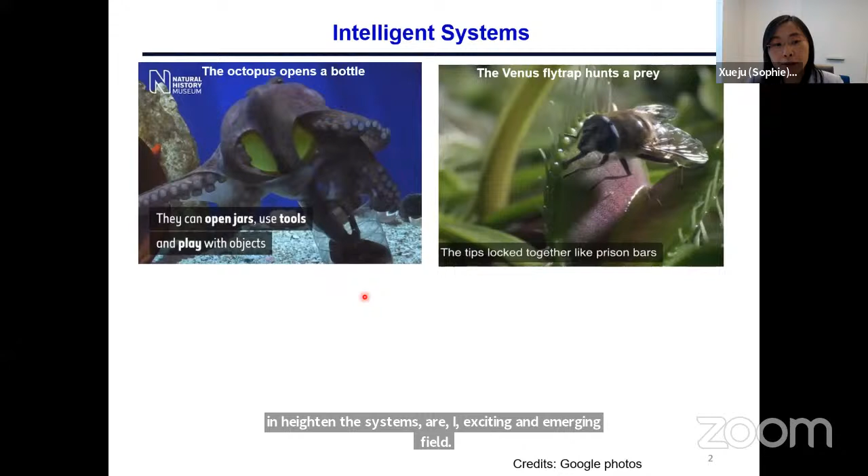So as the title indicated, today I'm going to share with you our work on morphing materials and multifunctional structures and electronics for potential applications in intelligent systems. Intelligent systems are an exciting and emerging field. When we talk about intelligent systems, we can easily think of our familiar biological systems. For example, an octopus, which can change its shape and color to adapt to their environment. The Venus flytrap is another example. It can catch the prey when its sensitive hairs in the inner surfaces are triggered by the prey's movement.

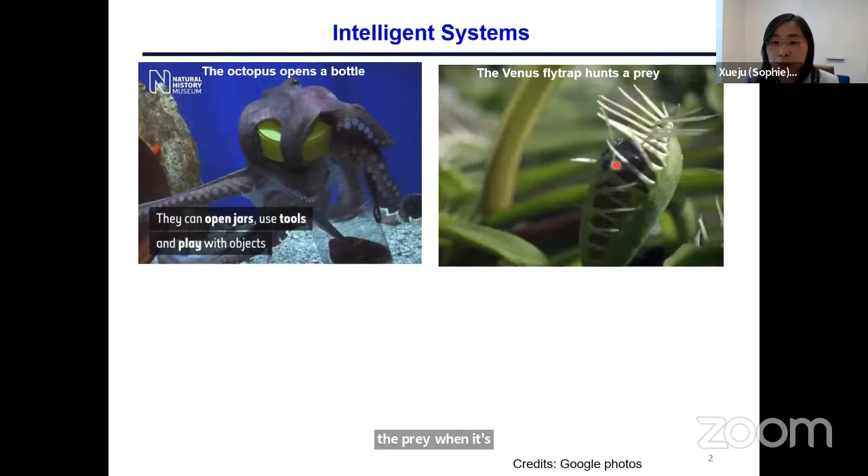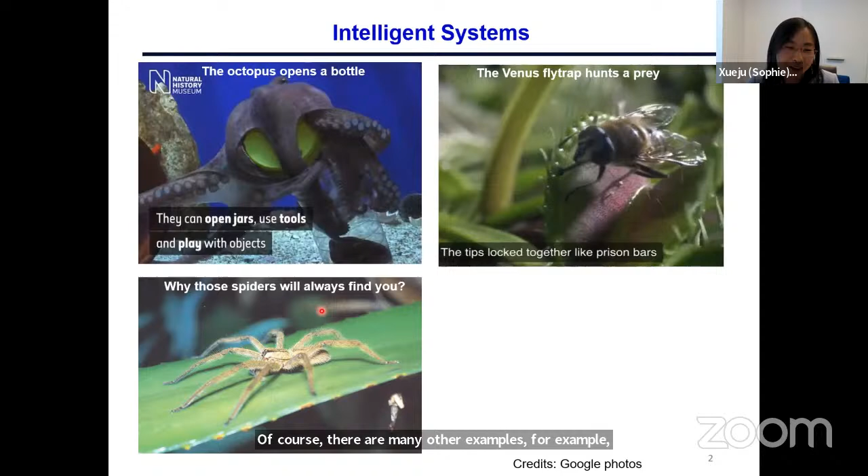Of course, there are many other examples. For example, the spiders, which will always find you. It sounds a little bit scary, but this is because it can detect even very quiet movements by using its more than 3,000 strain sensors distributed across its body. Last but definitely not least, our human body, right? The human brain is such an intelligent system that there is so much work going on trying to unlock the mystery of the human brain, including the electrical signals and more recently, the brain chemistry. So understanding and mimicking the performance of those intelligent systems are significant for many engineering applications. For example, for performing tasks in unstructured real-world scenarios, disease diagnosis and treatment, and many others.

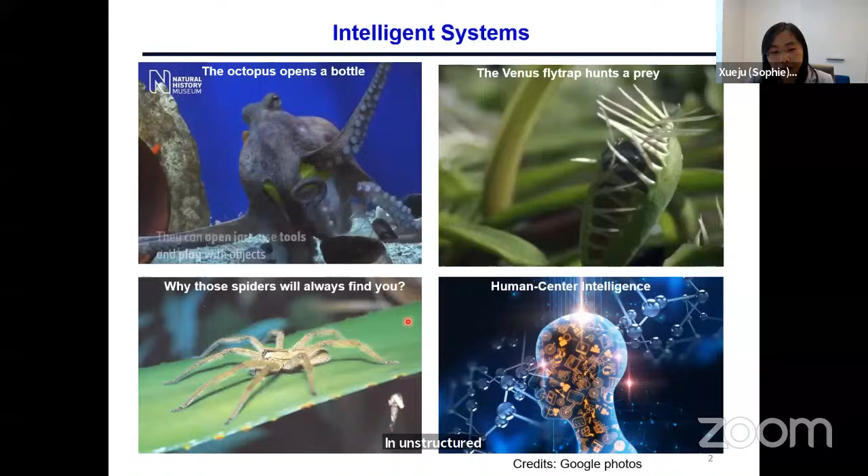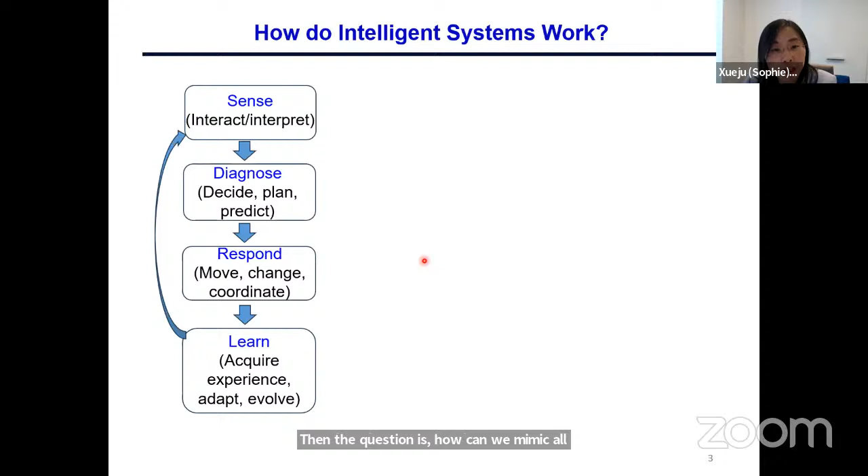So how do intelligent systems work? Basically, they first sense or interact or interpret their environment by using their sensors, and then they can diagnose and respond by moving, changing their morphology and colors. Those information can be further stored and processed so that they can acquire experience and evolve over time as this loop continues. Then the question is, how can we mimic or eventually even go beyond the performance of those intelligent systems that exist in nature?

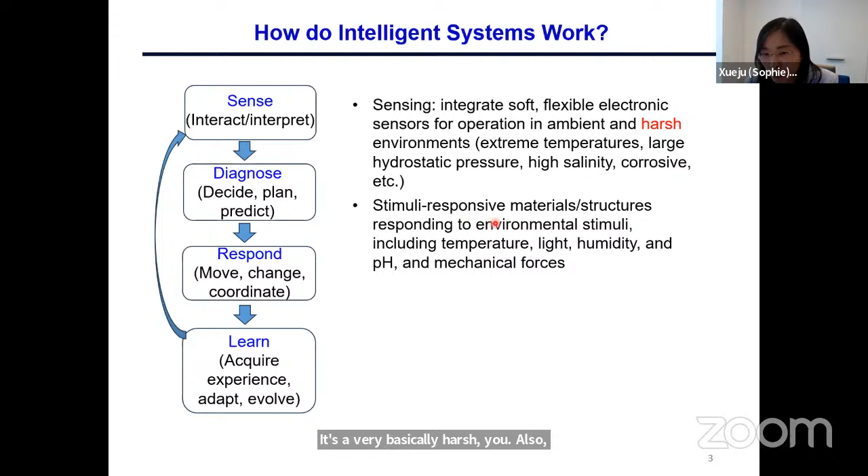So to do that, for example, first to sense the environment, we need to integrate sensors, usually in a soft, flexible manner for operation in ambient environments, but also in harsh environments. For example, extreme temperatures, large hydrostatic pressure, high salinity, corrosive environments in the ocean, because if you think about the environment that a lot of creatures like an octopus live in, it's basically a very harsh environment. Also, we want to have stimuli-responsive materials and structures that can respond to environmental stimuli, including temperature, light, humidity, pH, and also mechanical forces to basically interact with the environment.

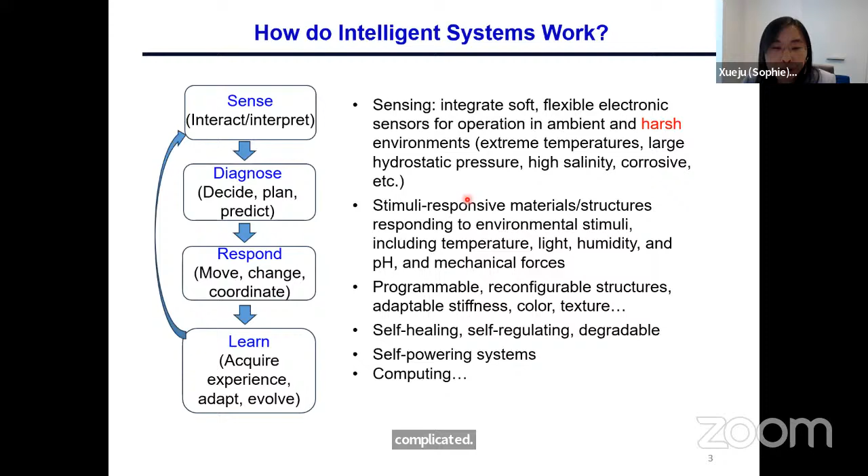Also, it is important to adapt to the environment, which can be realized by, for example, programmable, reconfigurable structures, adaptable stiffness, color, texture. Additional features include self-healing, self-regulating, degradable, self-powering systems, and computing. So it has to be admitted that intelligent systems are very complicated. For the past few years, I have been trying to address some of those aspects in my group. Basically, we work at the intersection of materials, mechanics, and multifunctional structures and electronics.

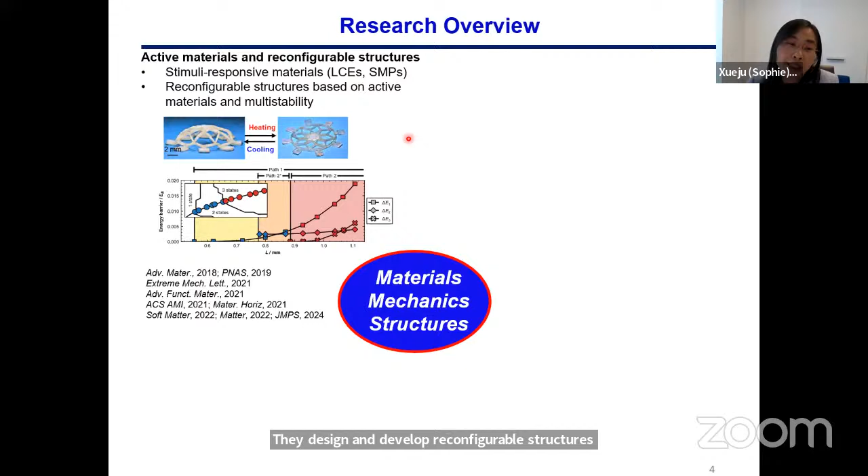More specifically, we study three major directions. One is active materials and reconfigurable structures, including stimuli-responsive materials like liquid crystal elastomers that I will discuss later, and shape memory polymers. We design and develop reconfigurable structures based on those materials and also based on mechanical multistability. In addition, we also develop functional structures to interface with biology, including 3D electronics for the monitoring and the stimulation of engineered tissues, and also 3D microfluidics in a shape-programmable manner to mimic many biological features.

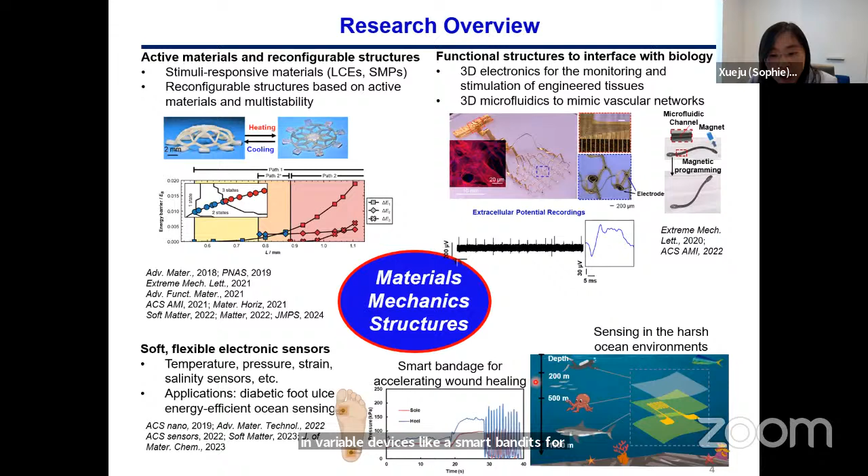In addition, we also develop soft, flexible electronic sensors, including physical sensors like temperature, pressure, and strain sensors, and also chemical sensors like salinity sensors for applications in wearable devices like smart bandages for accelerating diabetic foot ulcer healing, and also for sensing in harsh ocean environments.

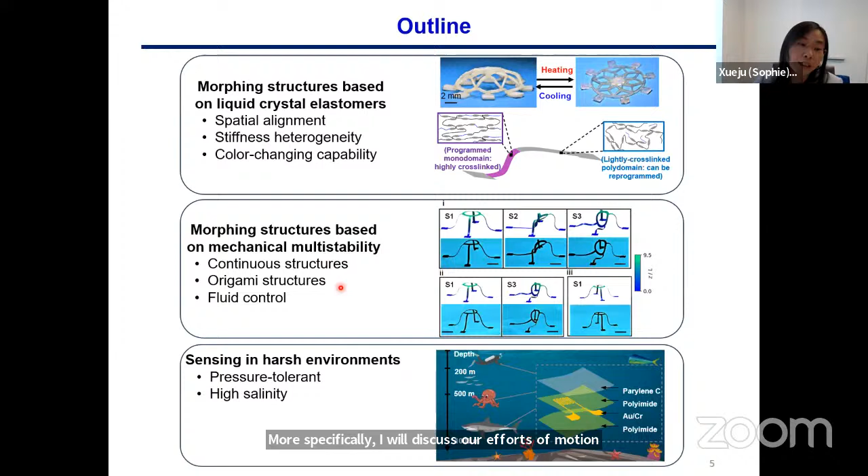So in today's talk, I will cover some of those aspects due to the time limit. More specifically, I will discuss our efforts on morphing structures based on active materials, liquid crystal elastomers, and also based on mechanical multistability. And then I will discuss our efforts in sensing, especially in harsh environments.

Okay, so morphing materials and structures are promising for many applications like soft robotics, artificial muscles, and other intelligent systems. Based on the deformation mechanism, typically morphing structures can be divided into two categories. One is based on soft active materials like hydrogels, magnetic composites, liquid crystal elastomers that can respond to external stimuli like temperature changes, magnetic field, and humidity to change their shapes and therefore their functionalities.

So those types of soft active materials have enabled a lot of interesting and exciting opportunities and structures. One potential limitation is that they require persistent external stimuli to maintain the deformed state. For example, for the magnetic composite structures, when we remove the magnetic field, the structures will return to the original shape. So this may cause some inconvenience and also make it less energy efficient for some applications.

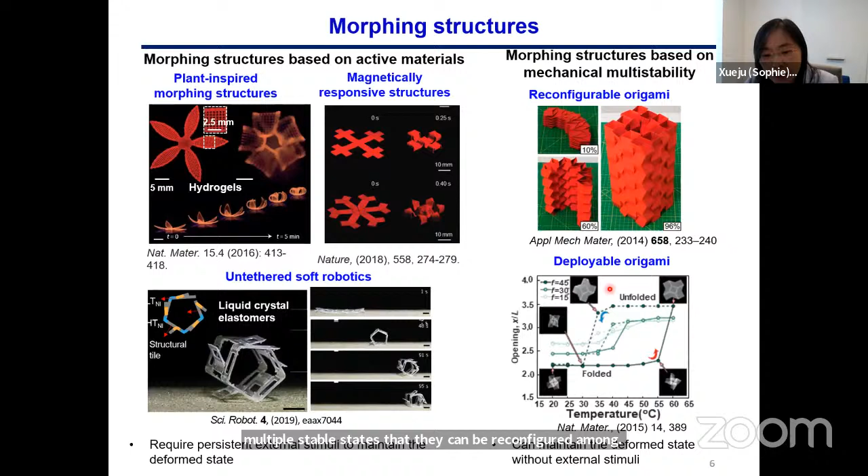So in the past decade, people also developed morphing structures based on mechanical multistability. For example, origami and kirigami structures that have multiple stable states that they can be reconfigured among. So an advantage of this type of morphing structures is that they can maintain the deformed state without the need for persistent external stimuli because its state is locally stable.

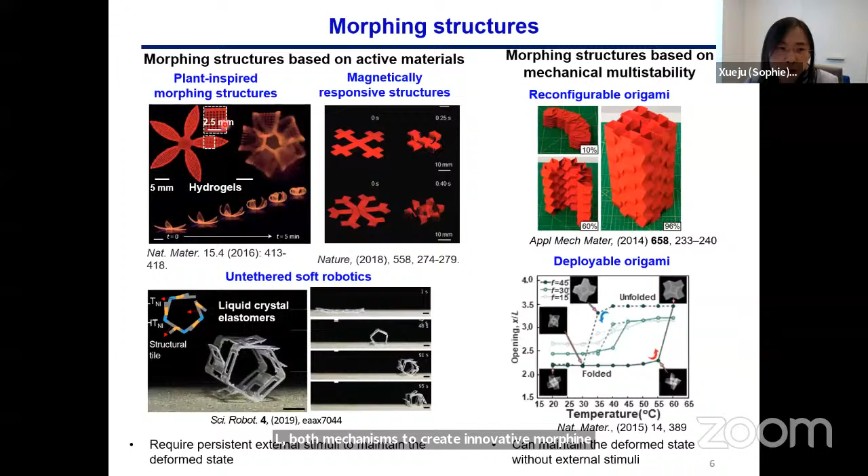So next, in this talk, I will discuss our efforts for both categories and also our efforts leveraging both mechanisms to create innovative morphing structures. So I will start with morphing structures based on soft active materials, in particular liquid crystal elastomers. Liquid crystal elastomers are a type of smart material that combines the rubber elasticity of polymer networks and the orientational order of liquid crystals. I think we have also had EML webinars given by Kaushik and Robin on these materials.

So this material has attracted much attention for applications including artificial muscles and soft robotics because of their unique properties, including soft elasticity and large reversible shape changes. The reversible shape changing behavior is closely coupled with a reversible state transition of liquid crystals, also called mesogens. For example, to program mesogens in liquid crystal elastomers for actuation, we first align the mesogens along a direction called a director into a state called a nematic state.

Heating above a temperature called the isotropic clearing temperature will disrupt this mesogen order into an isotropic state and drive the macroscopic shape changes. This state transition can be reversibly realized so that we can have the reversible shape changing behavior upon cooling and heating across the isotropic clearing temperature of the structure. So you can see that the reversible shape changing behavior is closely related to the mesogen alignment, right?

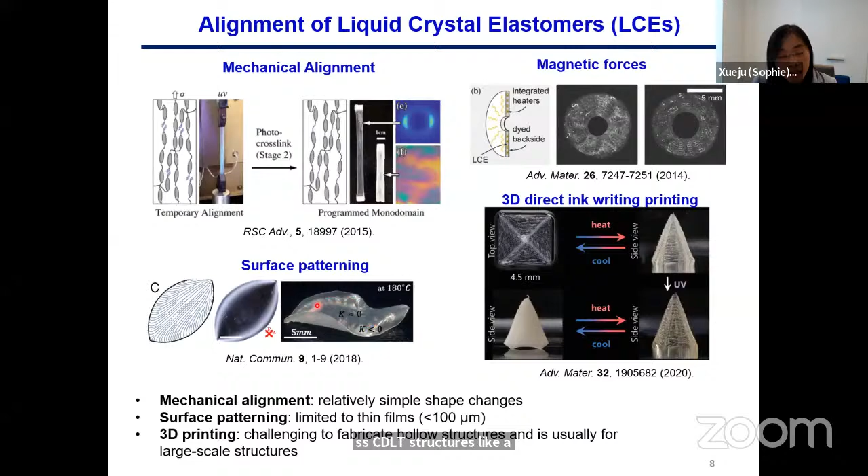So those techniques are great for creating diverse 3D LCE structures for shape morphing, but still it's very challenging to create, for example, hollow open-mesh 3D LCE structures like helices and spirals for many applications like soft robotics and other intelligent systems. So here we developed a facile and versatile strategy for the spatial alignment of LCEs to create previously inaccessible 3D LCE structures.

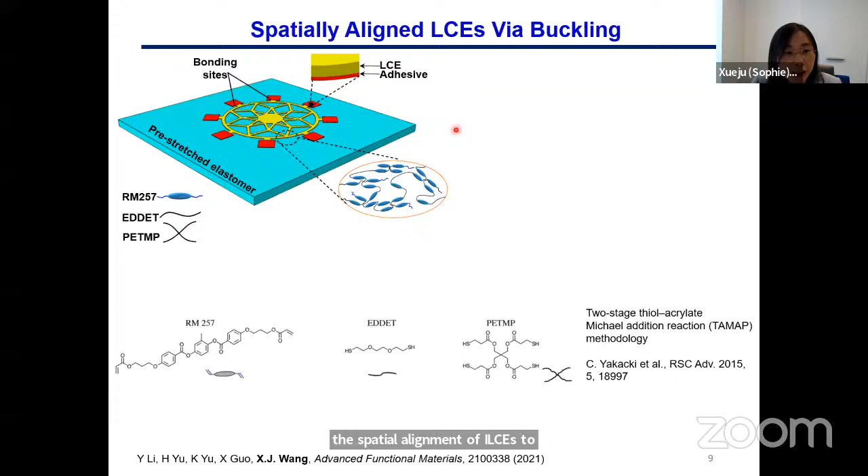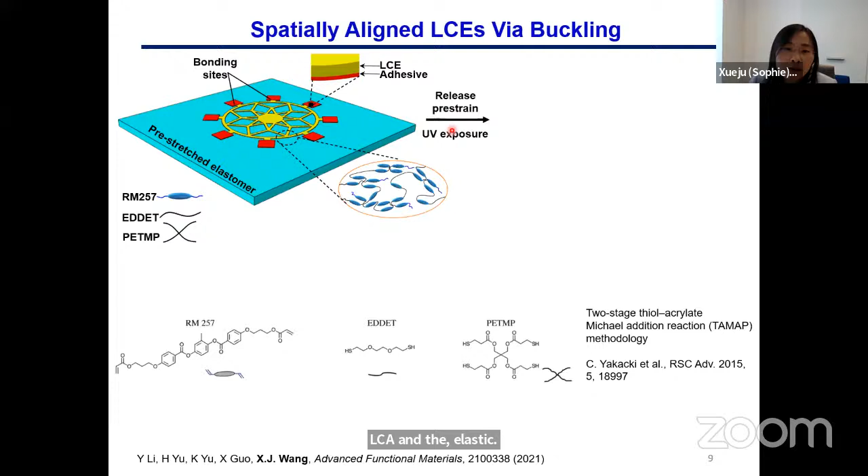And then by releasing the pre-strain, we can geometrically transform the 2D patterns into the 3D architectures due to these compressive forces. So during this process, the mesogens are spatially aligned into their nematic state because of the compressive strain in the material. So UV exposure induced additional cross-linking and also permanently programmed the mesogen alignment, which provides immediate access to freestanding 3D LCE structures.

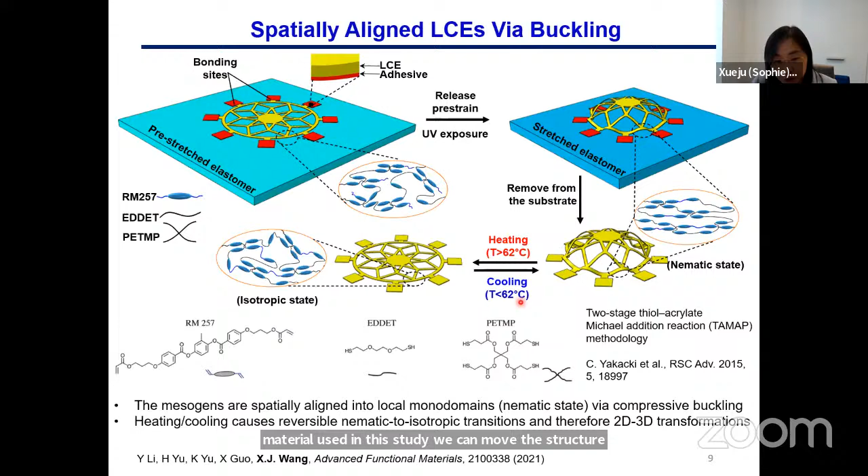By heating and cooling across the isotropic clearing temperature, which is 62 degrees for the material used in this study, we can morph the structure between 2D and 3D configurations reversibly. Okay, so here are the experimental and finite element analysis results of the 3D LCE structures, as well as the dynamic shape morphing behavior of the structure.

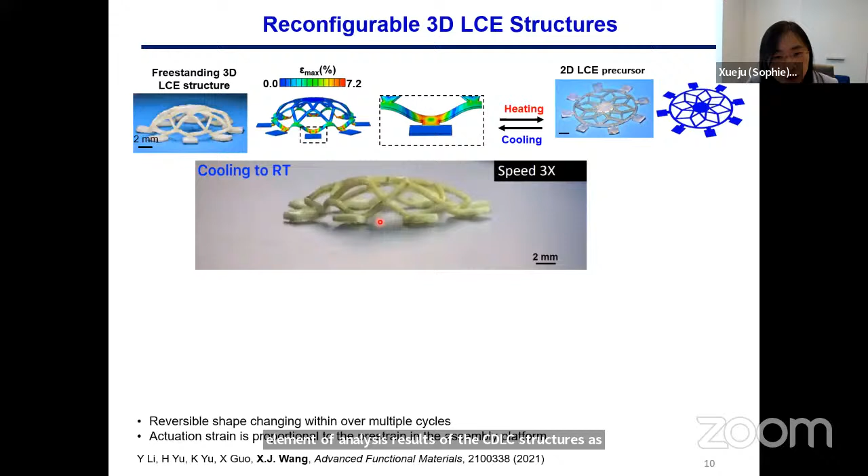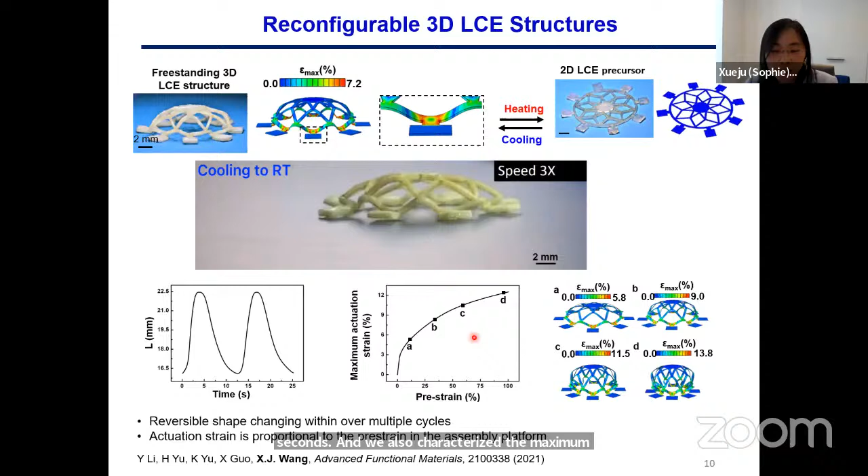So we also characterized the thermal response of the structure, basically how fast it can respond to the thermal stimuli. For this particular structure, it's a few seconds. And we also characterized the maximum actuation strain of the structure, which is shown to be proportional to the pre-strain in the assembly platform.

So here are a series of experimental and simulation results of the 3D LCE structures enabled by this technique, including those that can mimic, for example, a butterfly, a cage, and we also presented their reversible shape morphing behavior. You can see the 2D pattern and the 3D structure after heating and cooling. So those structures are previously inaccessible using techniques such as 3D printing and surface patterning. So they can expand the structure space of 3D LCE structures.

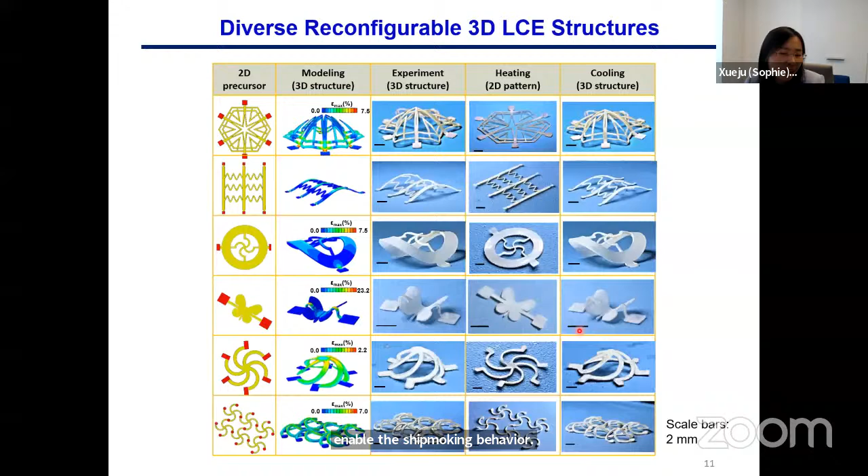Also you may notice that for some structures, even with a small amount of compressive strain, we can enable this mesogen alignment and the shape morphing behavior. So we were very curious about what the mesogen alignment looks like within these complicated 3D structures. When we looked at existing techniques, we found WAXS and FTIR, two commonly used techniques for mesogen alignment characterization. But unfortunately, they require 2D thin film samples for testing, which is not available for our complicated 3D structures.

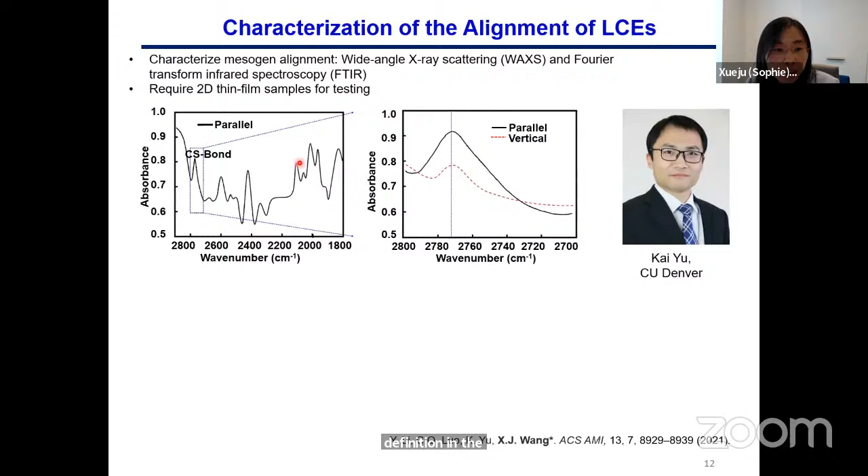So to estimate the mesogen alignment degree in the 3D structures, what we did is we first calculated the strain distribution within the 3D structure, and then we performed the testing on 2D thin film samples corresponding to the strain levels. This way, we can estimate the order in the 3D LCE structure. Also, this testing is in collaboration with Professor Kai Yu at CU Denver.

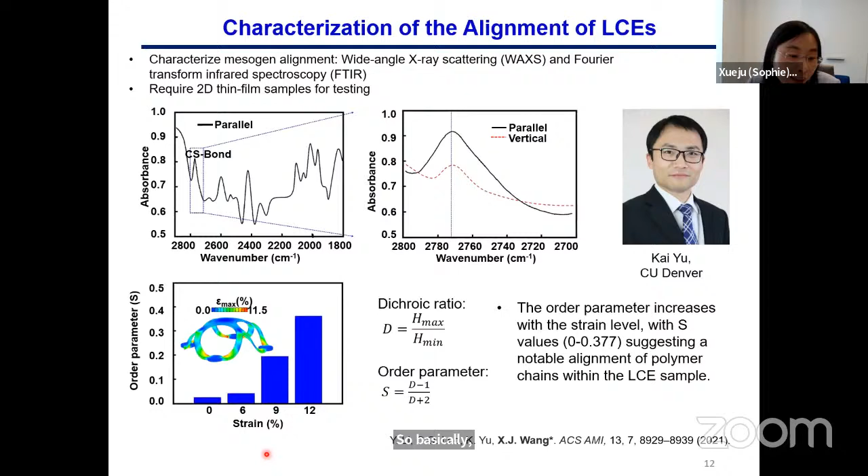So I will skip the details, but we can see that the alignment degree, which is quantified by a parameter called the order parameter in LCEs, is proportional to the strain levels. For example, at a strain level of 12%, it has an order parameter of 0.377. For your reference, this order parameter is usually below 1. So it suggested a notable alignment of polymer chains within the LCE sample already with a small amount of strain.

Okay, so in addition to creating 3D LCE structures using pure LCEs, we also added other functional elements, for example, magnetic particles, to the material for two purposes. First is to enable very compliant structures, because the strain energy required for compressive buckling is proportional to the Young's modulus of the material. So adding magnetic particles can enhance the mechanical properties of LCE structures. The second purpose is to enable magnetic actuation, which is fast and remote, beyond thermal actuation.

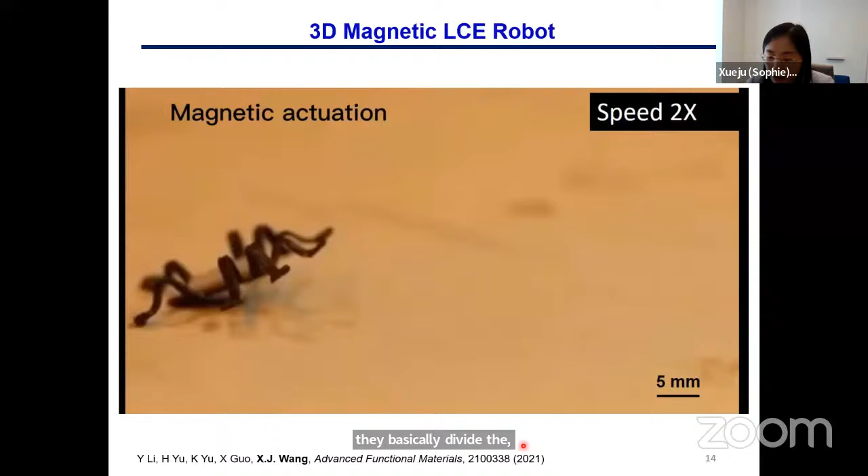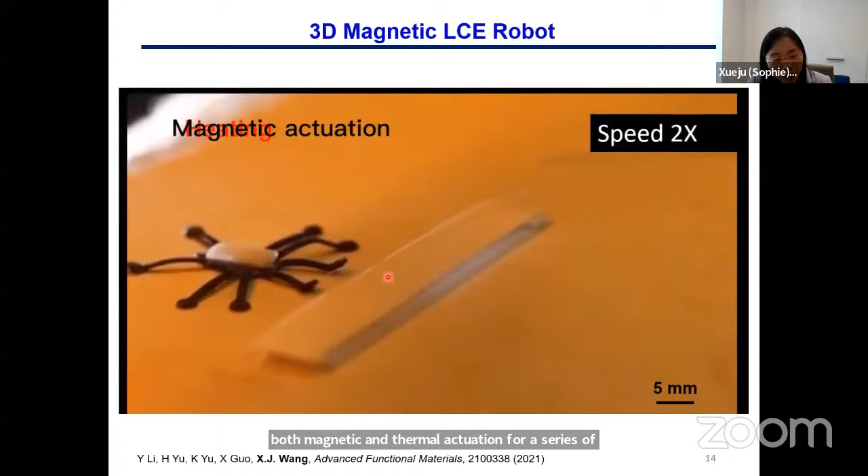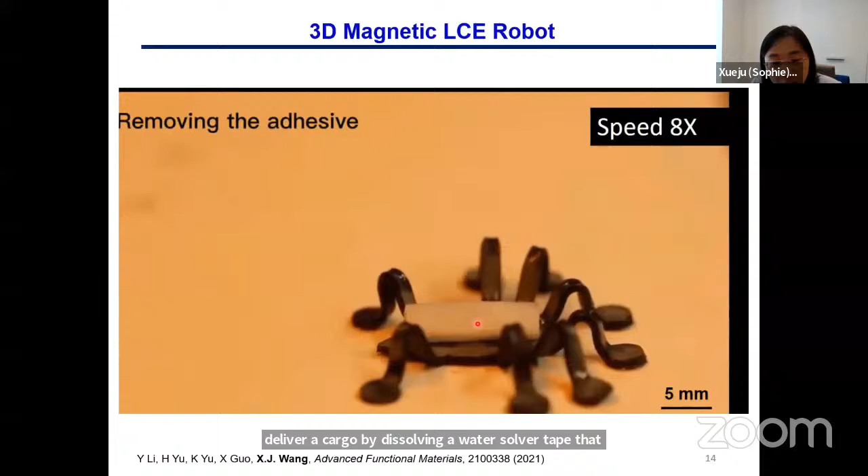Okay, to demonstrate the potential applications of LCEs, we developed a biomimetic soft LCE robot from magnetic LCE composites that can respond to both magnetic and thermal actuation for a series of biomimetic behaviors. For example, jumping, crawling across an obstacle, and crawling under a narrow crack by morphing between the 2D and 3D configurations, and also delivering cargo by dissolving a water-soluble tape that was used to secure the object onto the robot.

Okay, so far I have discussed our efforts in creating previously inaccessible 3D LCE structures and 3D magnetic LCE composite structures. You may notice that most of the structures are symmetric, and also they have uniform stiffness. As I mentioned at the beginning, for intelligent systems, a lot of times they need adaptable stiffness and asymmetric geometries to mimic those intelligent systems that exist in nature.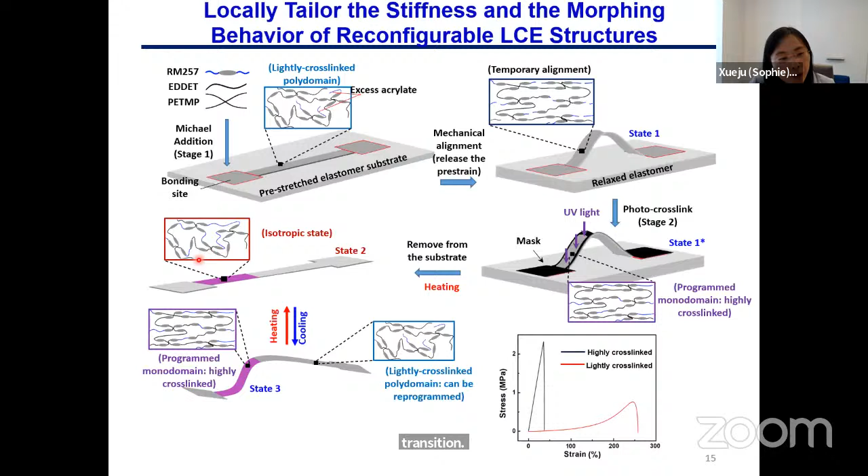Okay, so after being removed from the substrate and heating, you can see that the structure can morph to the 2D configuration because of the isotropic-nematic state transition. But when it cools down, what is interesting is that, driven by the shape morphing in the UV exposed region, which is highlighted in purple, the structure morphs into an asymmetric structure with heterogeneous stiffness, with the purple region almost 50 times stiffer than the gray region, which is lightly cross-linked.

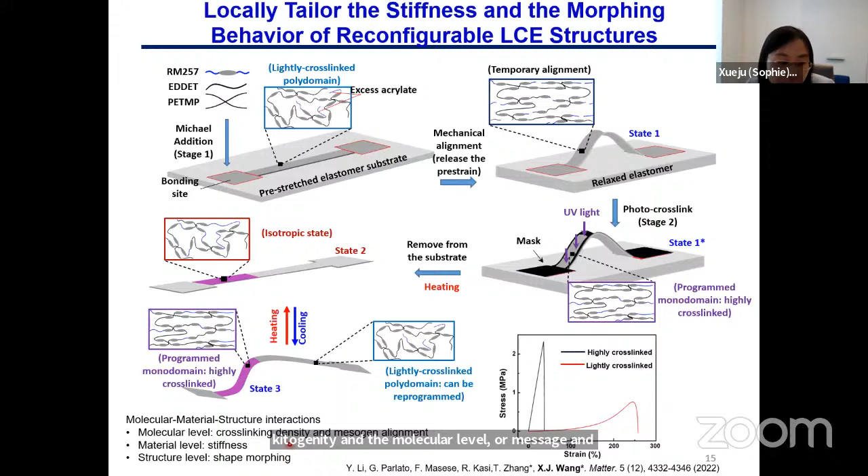So basically, this asymmetric interesting structure is achieved by harnessing the molecular-material-structure interactions. By selective photopolymerization, we can create a difference in cross-linking densities and mesogen alignments. Then they can decide the stiffness heterogeneity at the material level, and the material level stiffness heterogeneity and the molecular level mesogen alignment can synergistically create the local shape morphing behavior of the structure.

So here are the experimental and finite element analysis results of the local programming of LCE ribbon structures, which can start from an arc shape and then morph to this asymmetric structure after selective programming. The simulation is in collaboration with Teng, conducted by using the model change feature in Abaqus. We also qualitatively characterized the mesogen alignment at 2 locations to evaluate the mesogen programming.

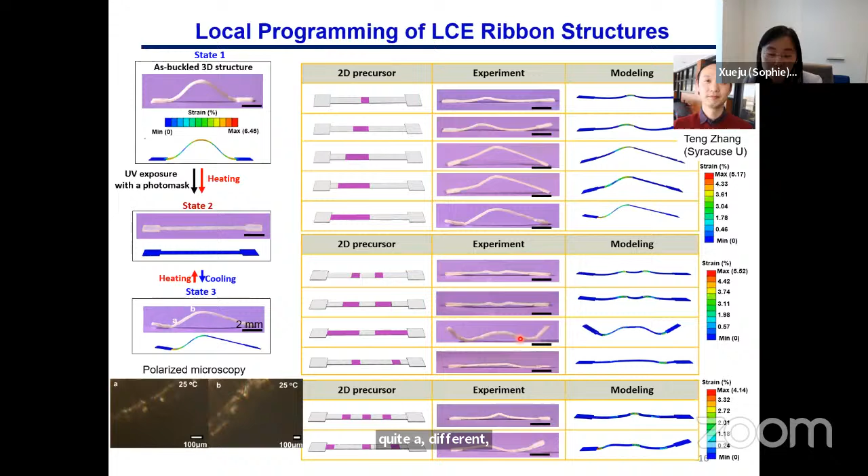In addition, we also studied how, for example, changing the cross-linking densities and the areas and locations of the mesogen alignment can give us different morphing behaviors and final configurations. We can see that starting from the same original structure, we can obtain quite different final configurations with different stiffness heterogeneities. In addition, the technique can be extended to other more complicated structures as shown here.

Also, in addition to creating or tailoring the local properties and shape morphing behaviors, we can further utilize the unprogrammed lightly cross-linked regions for sequential programming. For example, take this simple rod-like structure. When we program the first corner, we can achieve this structure with a square shape, and it has reversible shape morphing behaviors between this shape and the rod-like structure. We can further program the second corner to achieve different final shapes, and of course we can continue to program, for example, a third corner.

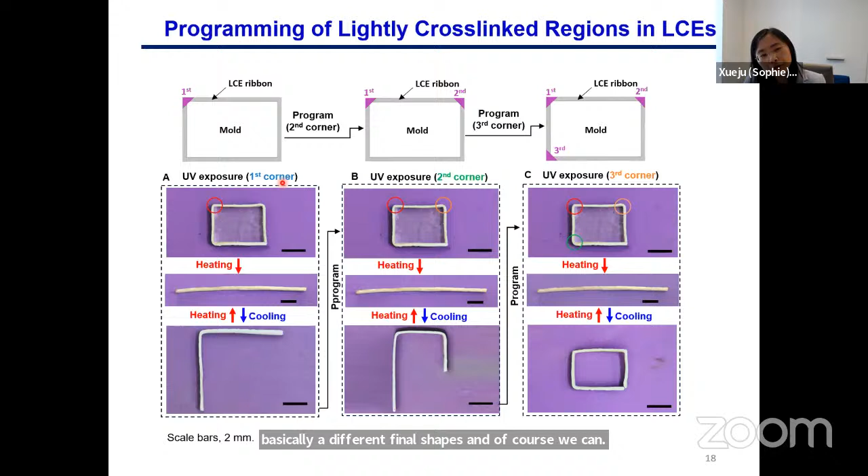Basically, starting from the same structure, we can have these multi-purpose functionalities. This sequential programming can be further expanded to membranes of LCEs. Here, as an example for demonstration, we sequentially programmed an LCE membrane to sequentially display facial features, for example, first the nose and mouth and eyes, the whole face, basically.

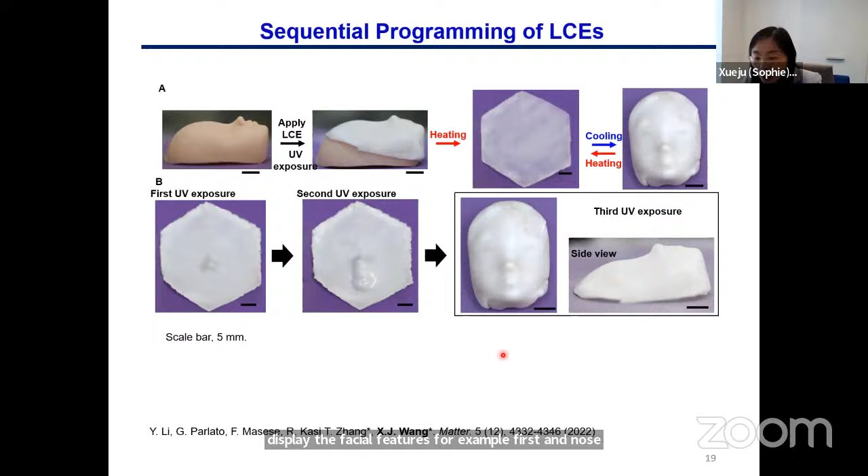So as I mentioned at the beginning, in addition to shape morphing, some creatures like octopus can also change their color for behaviors like camouflage to adapt to their environment. So here, by adding thermochromic dyes into LCEs, we can realize shape morphing and color changing LCEs within the same structure upon heating and cooling. For example, this octopus-like structure can morph to a colorless and 2D configuration for activities like camouflage behaviors.

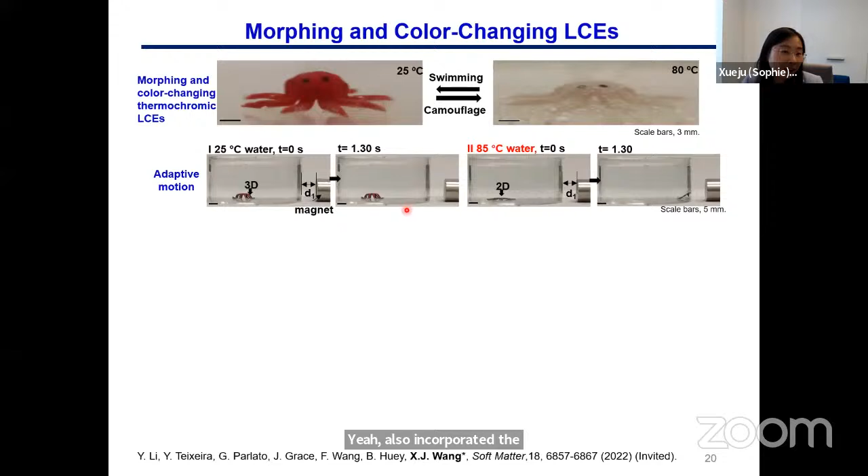We also incorporated magnetic particles for adaptive motion. For example, it will have different swimming speeds under the 2D and 3D configurations. In addition, we can realize biomimetic motion and camouflage behaviors by using these thermochromic LCE structures.

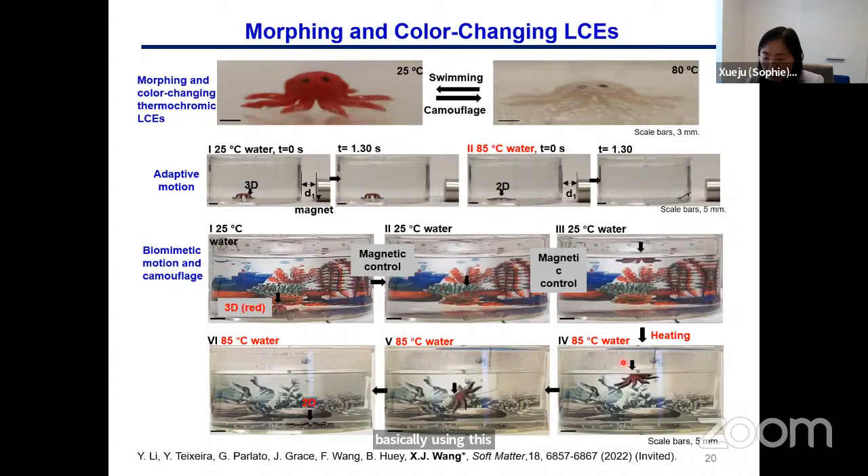Okay, so far I have discussed our efforts of morphing structures based on soft active materials, especially liquid crystal elastomers. We discussed how we can spatially align the materials for previously inaccessible structures, how to create stiffness heterogeneity, and color changing capabilities for potential applications in intelligent systems.

As I mentioned at the beginning, those soft active materials are great for creating a lot of interesting morphing structures. But one potential limitation is that they require persistent external stimuli to maintain the deformed shape, which may cause some limitations in some applications. So next, I will discuss our efforts in another type of morphing structures that is based on mechanical multistability.

In the past decade, people have made significant progress in this field. There are a lot of works, including those from the audience. Despite intensive studies, there are still a few critical challenges in this field, especially when asymmetric and complicated structures are involved. The first challenge is associated with the presence of multistable local minimum configurations. They could affect the stability of the targeted stable state under perturbations, for example, environmental noises, or trap the structure in an intermediate state during reconfiguration.

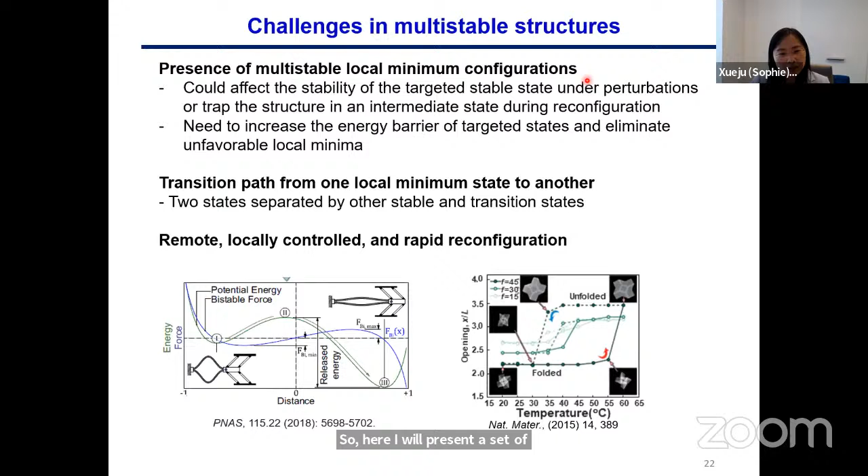So we need to increase the energy barrier of those targeted states and eliminate unfavorable local minima. Another challenge is associated with the complicated transition pathways from one state to another, especially when the two states are separated by other stable and transition states. In addition, remote, locally controlled, and rapid reconfiguration are usually desired for many applications. So here I will present a set of design concepts and strategies to address those challenges by using an integrated experimental and simulation approach.

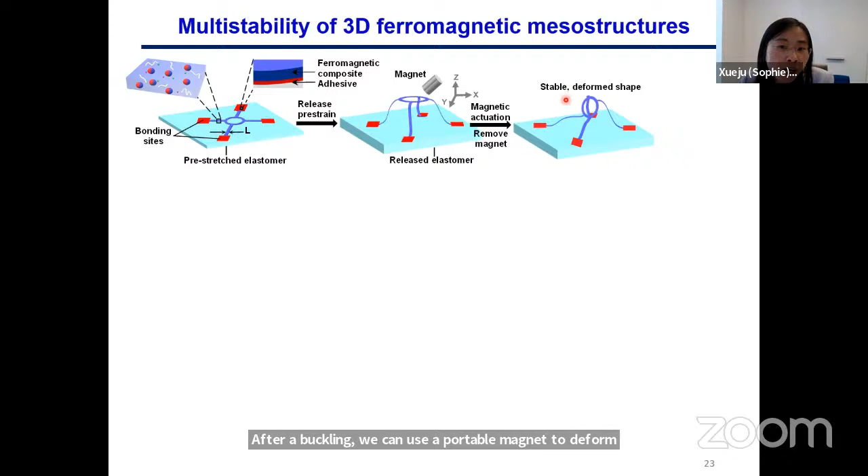We first use a 3D table-like structure as an example, also as a model system for this study. The structure is compressively buckled from ferromagnetic composite thin films. After buckling, we can use a portable magnet to deform it into another state. To our surprise, even for this very simple structure, we can find very interesting and distinct stable states by using experimental and simulation efforts in collaboration with Teng and Halim.

We found that this structure has 3 distinct stable states, in total 9 configurations. The first state is the symmetric as-buckled structure, as you can see here. State 2 has one arm of the table structure deformed. It has 4 configurations corresponding to 4 different orientations. State 3 has an additional arm deformed, 2 arms in total. It also has 4 configurations corresponding to the 4 orientations.

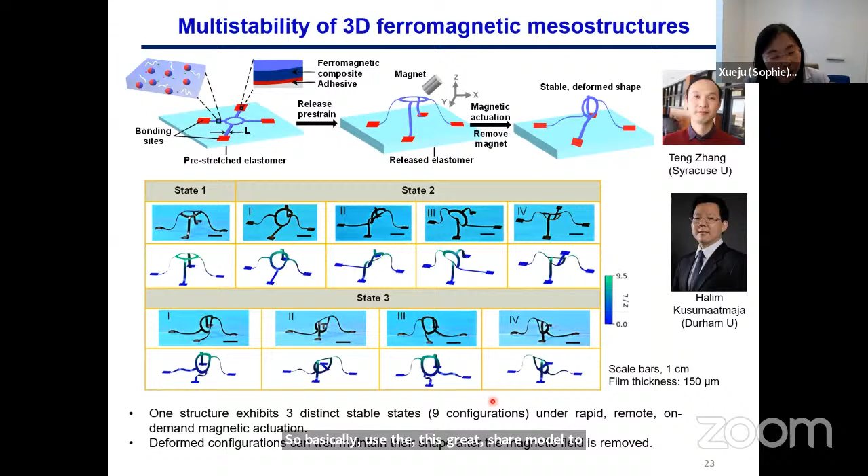We used a discrete shell model to model the nonlinear deformation of the structure, and by minimizing the energy of the structure, we can locate its stable states. We further studied how the material and geometry parameters affect the number and the configurations of the stable states. Here is a design phase diagram in terms of the number of stable states as a function of 2 dimensionless ratios of energy scales, gravitational, stretching, and bending, which contribute to the energies of the buckled structure.

We can divide the regions into 3 regimes. When the 2 energy scales are large, we have 3 states, as we discussed earlier. As they decrease, state 2 actually disappears or becomes unstable. When we further decrease this energy scale, we only have 1 state, the buckled-up state. We further validated the phase diagram with experiments, and the experimental and simulation results agree with each other pretty well.

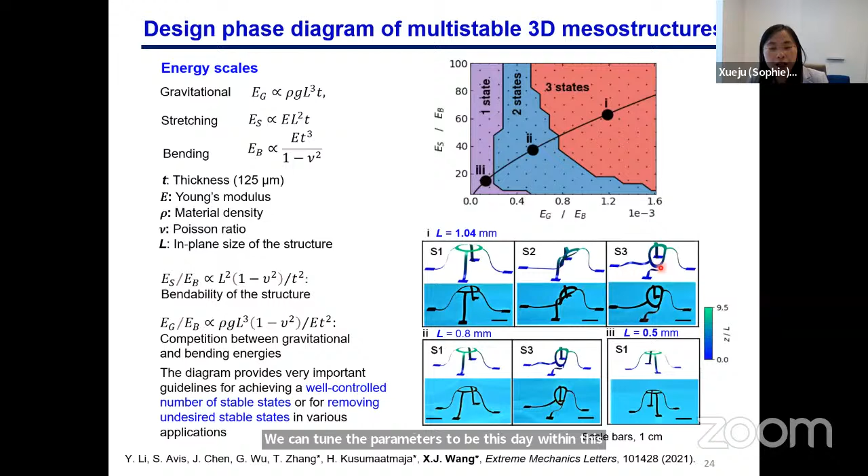This diagram provides very important guidelines for achieving a well-controlled number of stable states, or for removing undesired stable states for many applications. For example, if state 2, the 1-arm buckled-down state, is undesired, we can tune the parameters to stay within this blue regime, so that we only have state 1 and state 3 available. In addition to identifying the stable states, reconfiguration pathways, especially along the energy minimum pathway, are very important for many applications.

We further studied the reconfiguration pathways using the reconfiguration from state 3, with 2 arms buckled down, to state 1, the as-buckled structure, as an example. We explored how the pathways vary as a function of the geometry parameter, using the in-plane size of the structure as an example. Here is the diagram showing the variation of the energy barriers against this geometry parameter. We have 3 regimes. I will talk about the details in the next few slides, but in the first regime, 2 pathways, path 1 and path 2, exist.

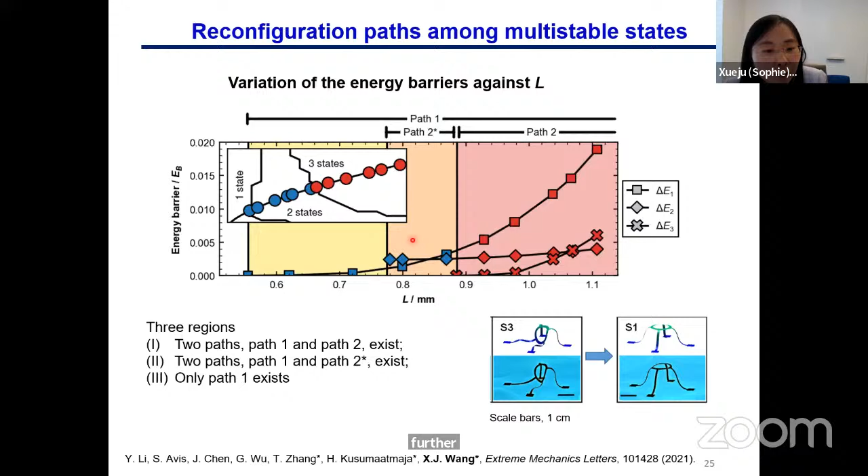In the second regime, as the geometry decreases, we basically still have two pathways, but the second pathway is a little different because state 2 is no longer available. When the dimension further reduces, we only have one path. So in the next few minutes, I will discuss more details about those pathways.

When the geometry is in this regime, there are two pathways transitioning from state 3 to state 1. Here is the energy as a function of normalized path length. The first pathway is a so-called direct pathway because it goes directly from state 3 to state 1. Here is the video corresponding to the simulation results. We can see that it does not bypass any other intermediate states.

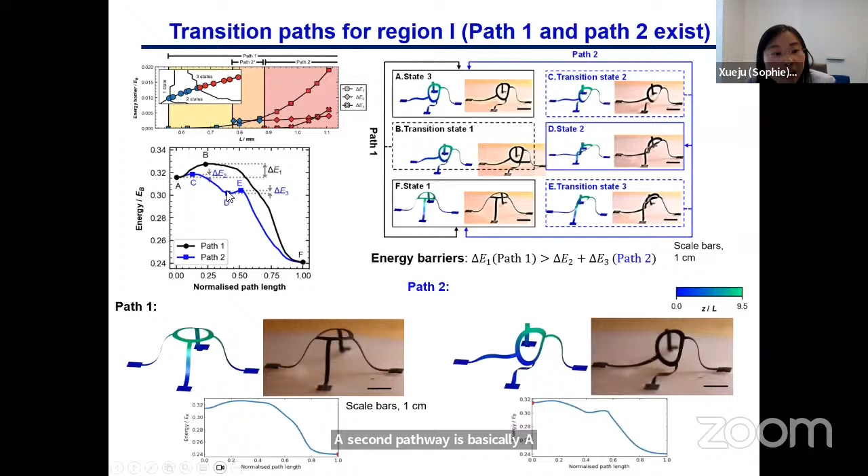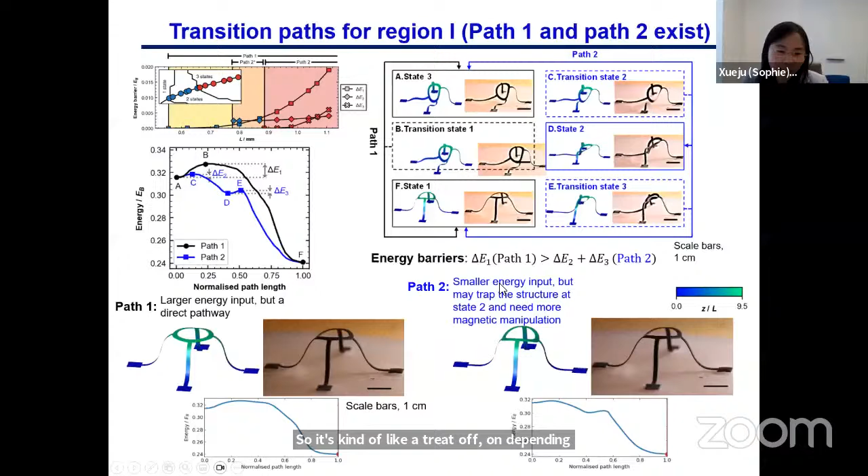A second pathway first goes to state 2 with one arm buckled down. Here is the video. You can see from state 3 it first comes to state 2, and then goes to state 1. Comparing the energy barriers of the two pathways, path 1 is larger, meaning it requires more energy input, although it's a direct pathway. Path 2 has a smaller energy input, but it needs to bypass state 2, so there's a potential that it may be trapped at this state, and it also needs more magnetic manipulation, as you can see from the video. It's kind of a trade-off depending on what application you want: smaller energy or a more direct pathway.

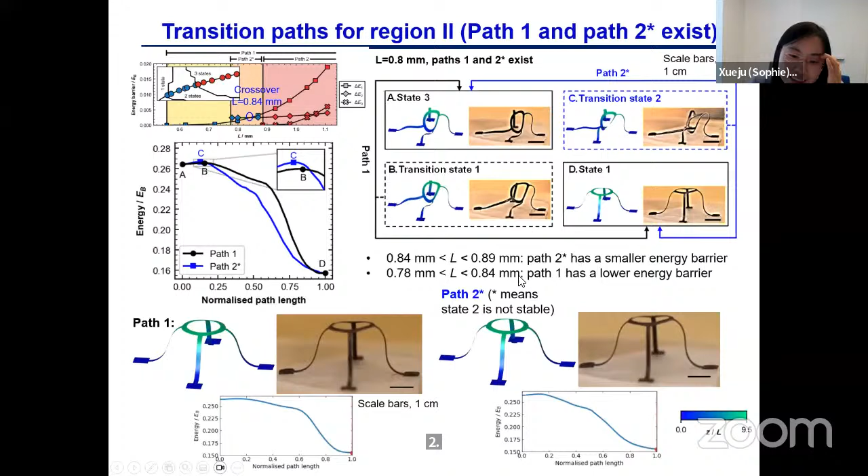When the dimension reduces, we come to the second regime, where state 2 is no longer stable. We still have two pathways with similar shape evolutions. Path 1 goes directly from state 3 to state 1. We use path 2 star here because state 2 is no longer stable. It follows a similar shape evolution, but no longer passes through state 2. We also found an interesting crossover within this regime — a critical point that decides which path has a smaller energy barrier.

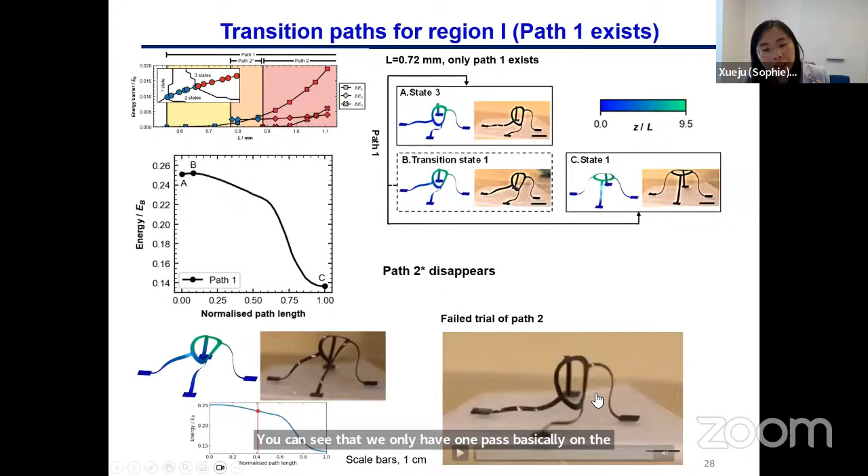As we further reduce the geometry of the structure, we only have one path, the direct pathway. The second path disappears because we can no longer reconfigure the structure through that pathway.

These studies clearly show that the transition pathways are very complicated, and the integrated experimental and simulation methodology can provide important guidance regarding the choice of pathways. You can also see that the experimental and simulation results agree with each other very well, which further indicates the fidelity and reliability of the methodology.

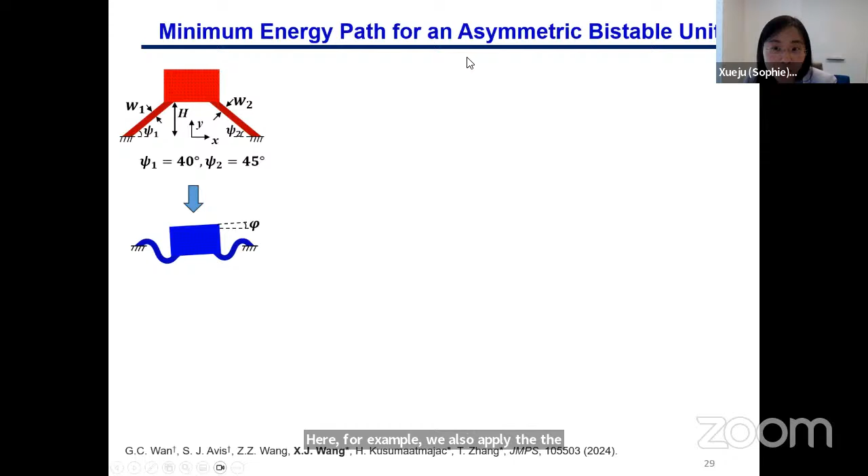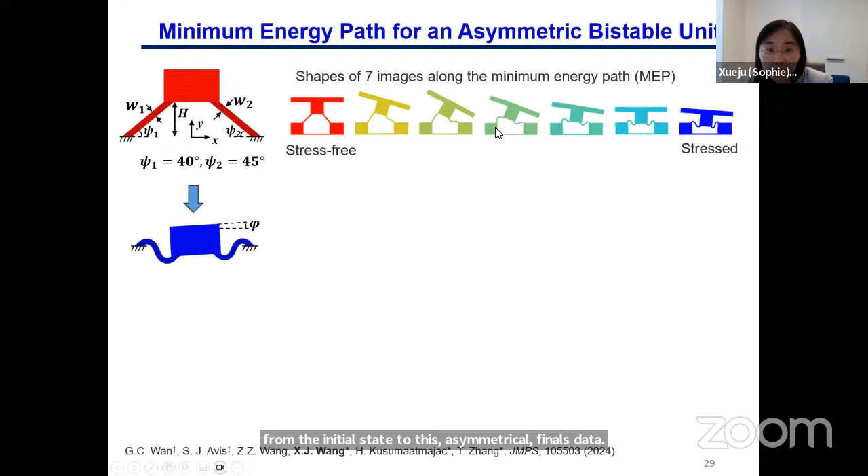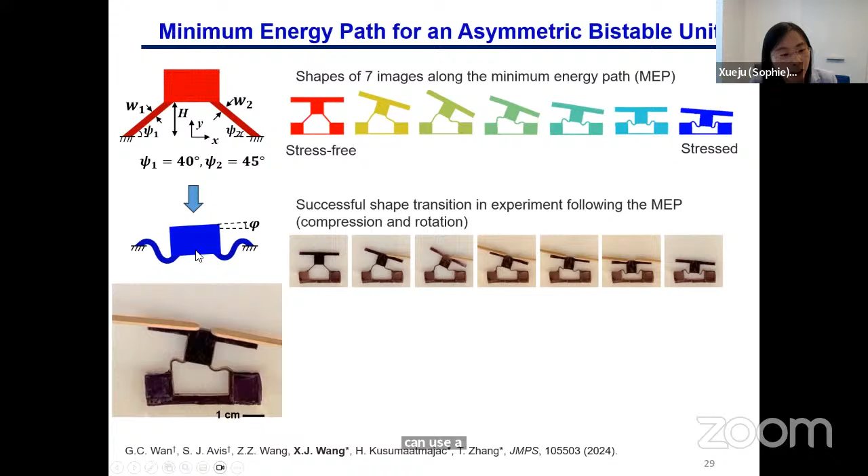The minimum energy path for this asymmetric bistable state is not that straightforward, but based on the studies we can successfully transition the shape following the pathway predicted in the modeling. Here is a video showing how we can use a wood strap to reconfigure the structure from the original state to the final state, which would not be available if we directly use pure compression.

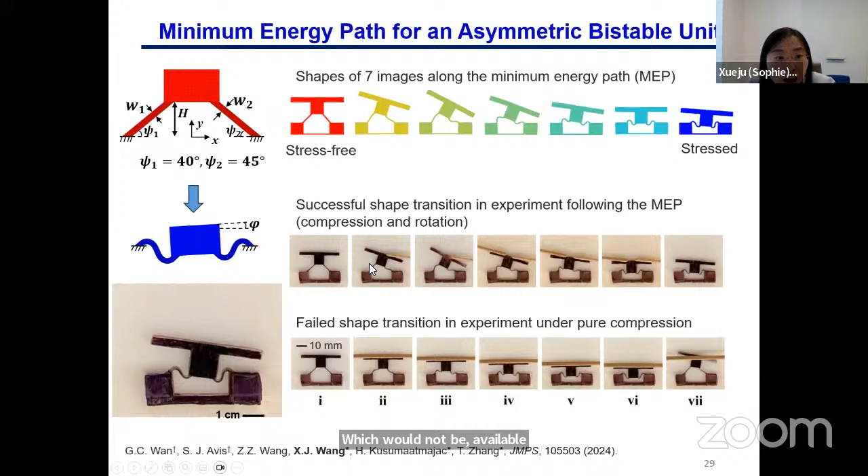So we developed this methodology and further expanded the study to origami-inspired multi-stable structures, where actively controlling the number of stable states and their reconfiguration pathways is also a challenge. Here we tune two control parameters, the number of creases and compressive strain, because they are easy to tune and more practical for many applications.

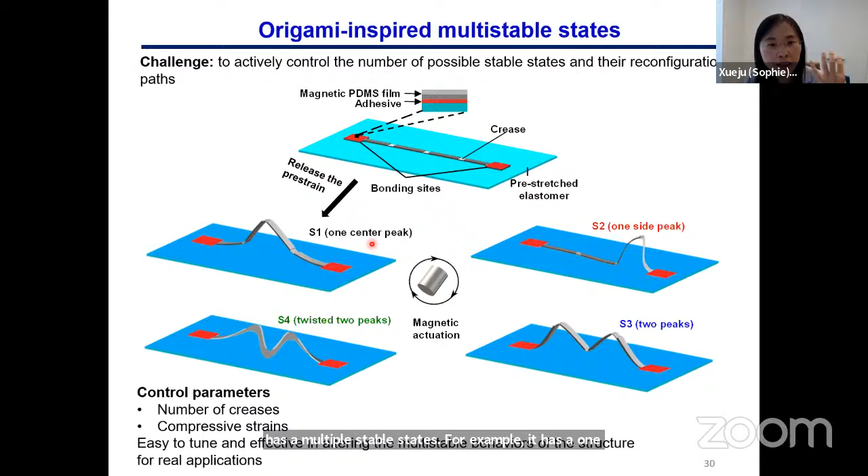We can see that the number and configurations of stable states highly rely on the number of creases and the strain levels used for the assembly. We studied how strain and the number of creases affect multi-stability separately. As the number of creases increases, the number of stable states first increases and then decreases. This is understandable because at the beginning it's a continuous structure, and when the number of creases increases to a certain level, it's also approaching a basically continuous level.

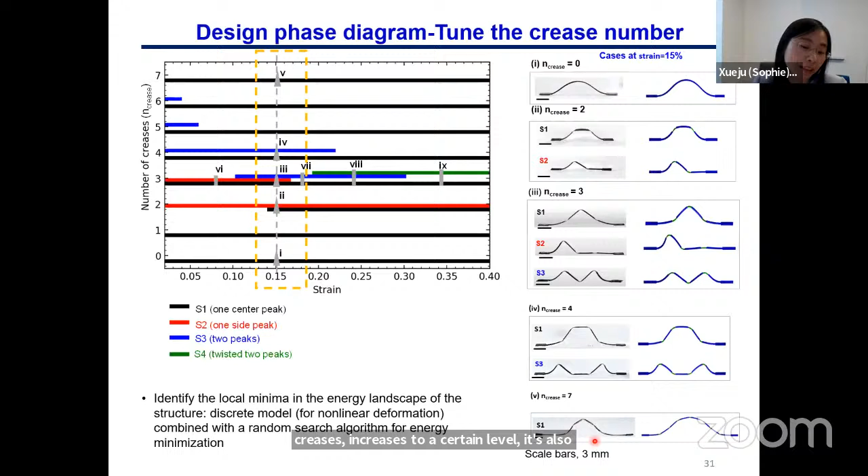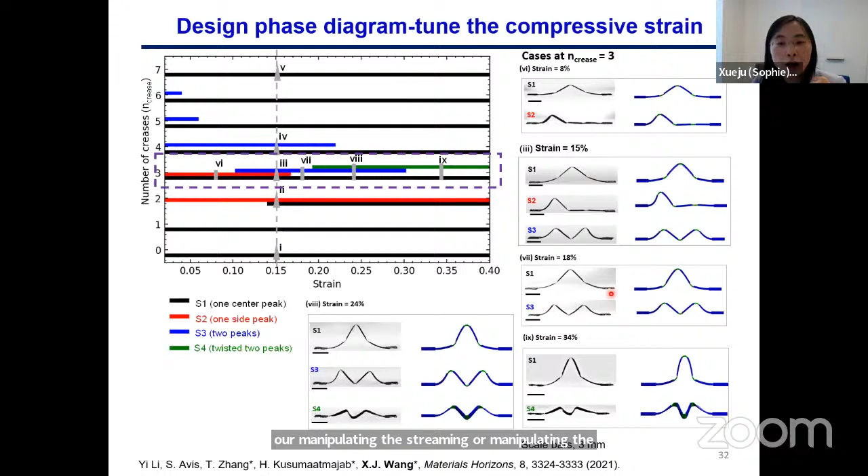Similarly, the strain level also significantly affected the number and configurations of the stable states. This indicates that by tuning or manipulating the strain level and number of creases, we can tailor the number and configurations of stable states.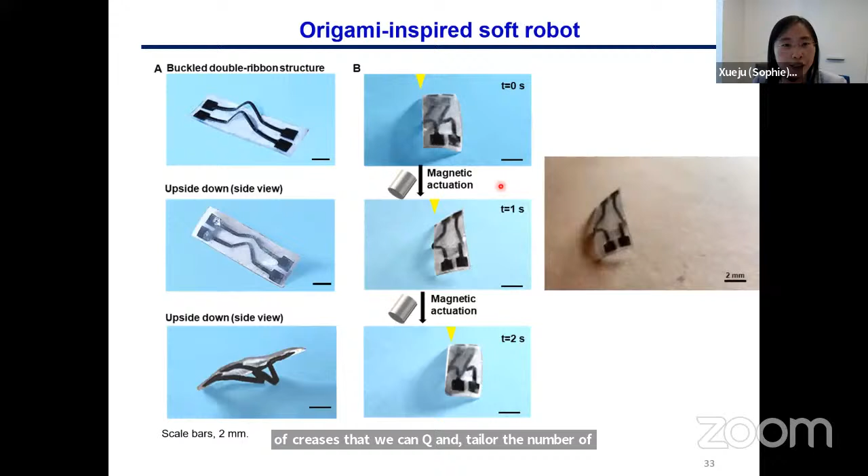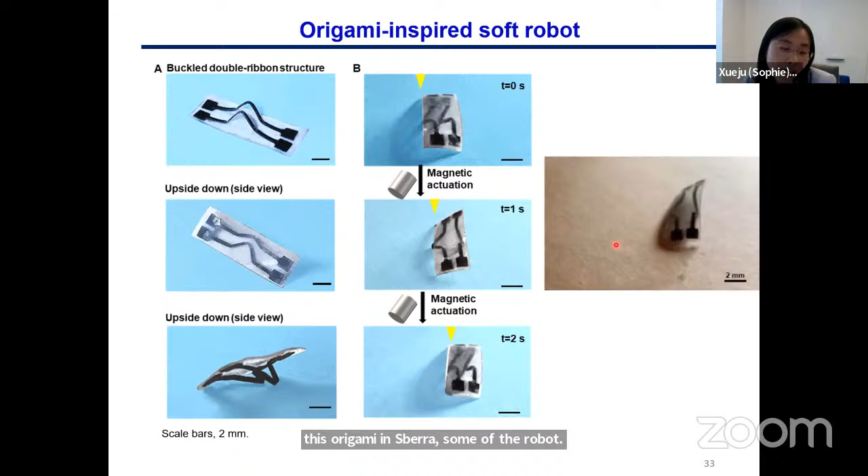As a simple demonstration, we developed this origami-inspired soft robot under magnetic actuation, potentially for application in intelligent systems. In addition to employing multi-stable structures for intelligent systems like soft robotics, we also expanded its application to other fields, for example the manipulation of droplets or fluid control.

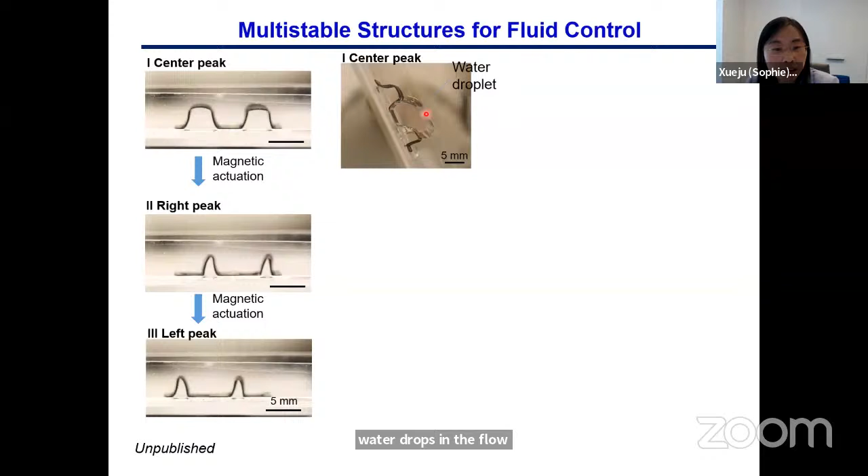For example, when it is in the so-called center peak state, the water droplet will be pinned within the structure. But when we use a magnet to tune the state to the left peak, you can see that the water droplet can actually flow. Here is a video showing how, by tuning the state of the structure, we can control the water droplet flow using a magnet.

That's basically how we can use state change to tune the water droplet flow. But not all cases result in that manipulation. For example, if you tune the center peak to a so-called right peak, the water droplet will still be trapped within the structure.

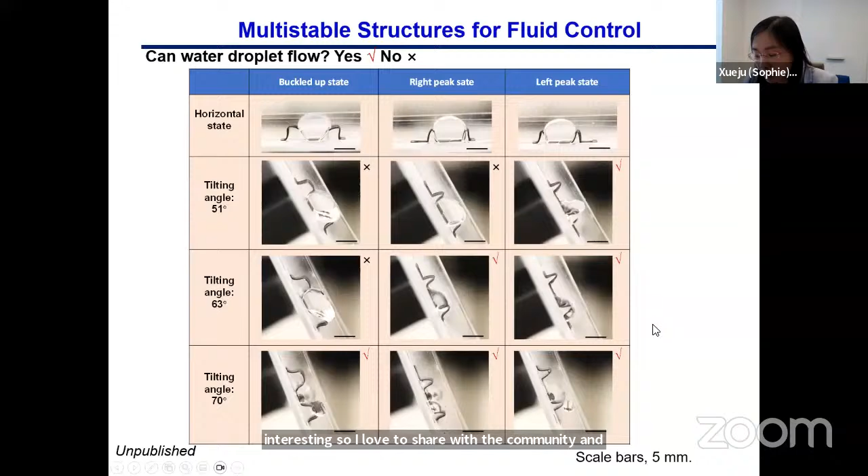So by using those stable structures, we can tune the fluid flow for potential applications. We characterized the critical angles for the water droplet to flow under different stable states as a guideline for potential applications. This work is still ongoing, but I think it's very interesting, so I'd like to share with the community and welcome comments and suggestions on this solid-fluid interaction with the structure.

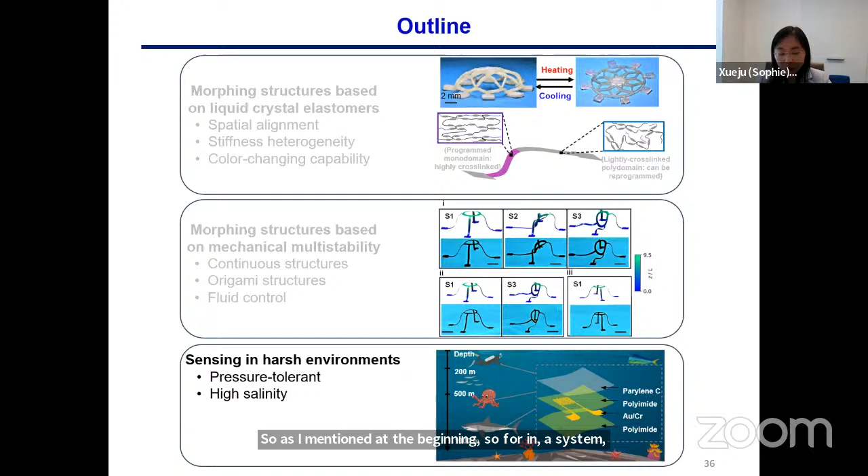So far I have discussed our efforts in morphing structures based on liquid crystal elastomers and also mechanical multistability for potential applications in multifunctional structures and intelligent systems. As I mentioned at the beginning, for intelligent systems, sensing in ambient and also harsh environments is very important. In the next couple of minutes, I will discuss our efforts in this space.

Sensing in the ocean is very important, not only for intelligent systems, but also, for example, for tracking fish and ocean animals, and also to understand the ocean environment.

The reason why I'm interested in this field is because I found that conventional ocean sensors, for example sensors that measure conductivity, temperature, and depth of the ocean, are very big. They also require high pressure chambers and seals to operate under the large hydrostatic pressure in the ocean. Therefore, they require large power supply and have a large footprint, which makes it impossible to integrate with many platforms. So the emerging soft electronics in the past decade has provided an alternative solution.

Soft electronics are made of soft and incompressible materials. They can potentially withstand large hydrostatic pressures and eliminate the need for pressure chambers, substantially reducing the power requirement and the size of the sensor.

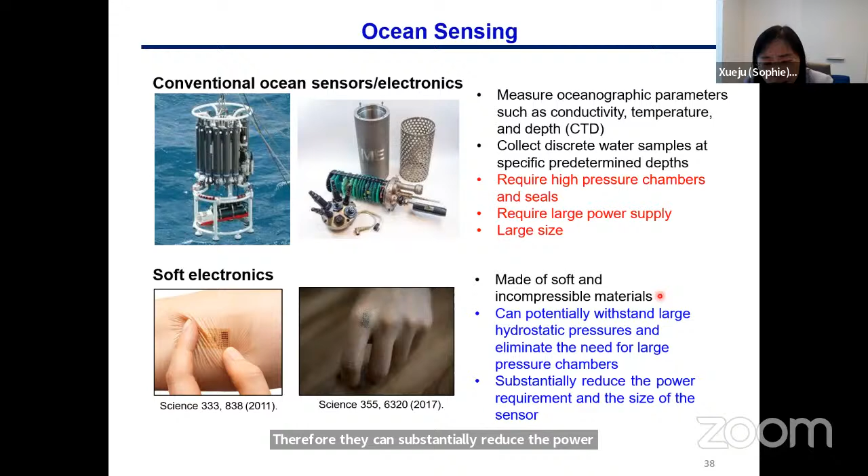Despite its great promise, there have been very few studies in this space. Current flexible electronics are mostly developed, for example, for biomedical devices which operate in low pressure regions, usually on the order of a few or tens of kilopascals. But ocean sensors need to operate under large hydrostatic pressure in the ocean, which requires large pressure tolerance.

Encapsulation of the sensor is another important aspect. Current flexible electronics are usually encapsulated with polymers or inorganic materials for operation in ambient conditions, like wearable devices, or in biofluids, like implantable devices. But ocean sensors need to survive the salinity environment and also the large hydrostatic pressure, while satisfying the desired measurement range, for example high pressure, temperature, and salinity.

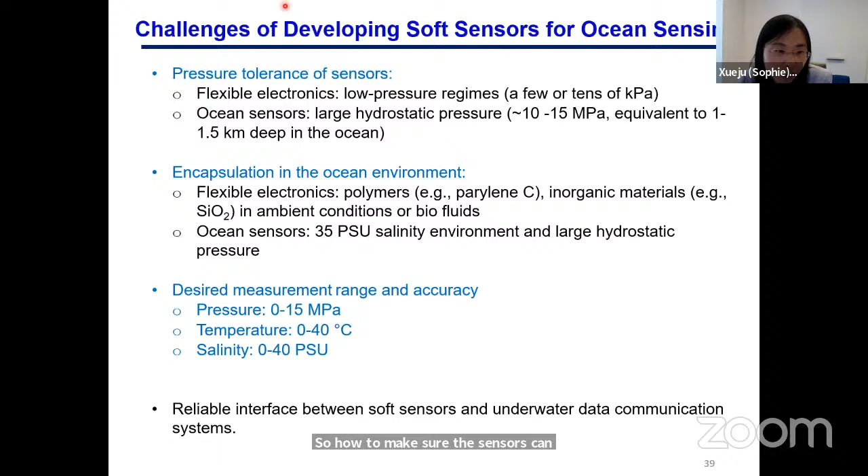Another aspect is the interface between sensors and data transmission, because in the underwater environment, the currently or typically used technologies, for example Bluetooth and near field data transmission, are no longer working. So how to make sure the sensors can transmit data reliably is also an important aspect. But in this talk, I will share our work to address the first three aspects.

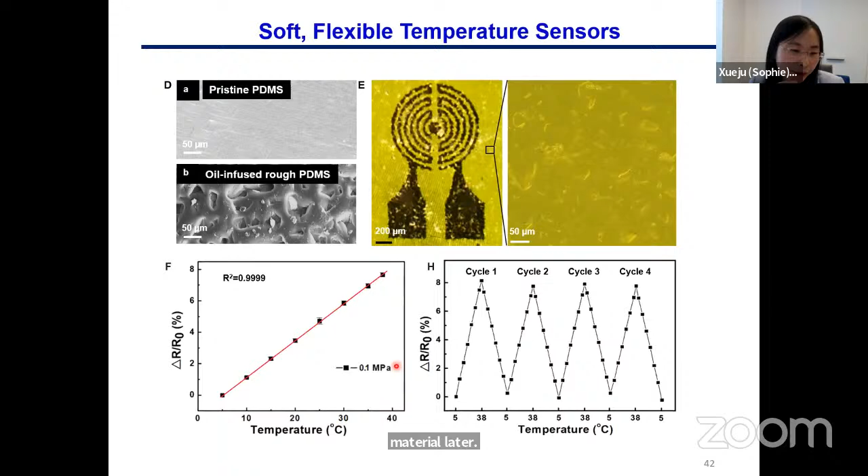But basically, we first characterized the sensor in ambient conditions. We can see that it has high linearity and good cyclic performance.

To simulate the large hydrostatic pressure environment in the ocean, we custom built a pressure vessel where we can control the pressure and temperature simultaneously for testing of the sensors. It can achieve a maximum pressure of 3,000 psi, equivalent to 2 kilometers in the ocean.

We can see that for the sensor, when tested under hydrostatic pressure from 0.1 megapascal to 15 megapascal, which corresponds to 1.5 kilometers in the ocean, it still maintains the linear relationship between the response of the sensor and the temperature.

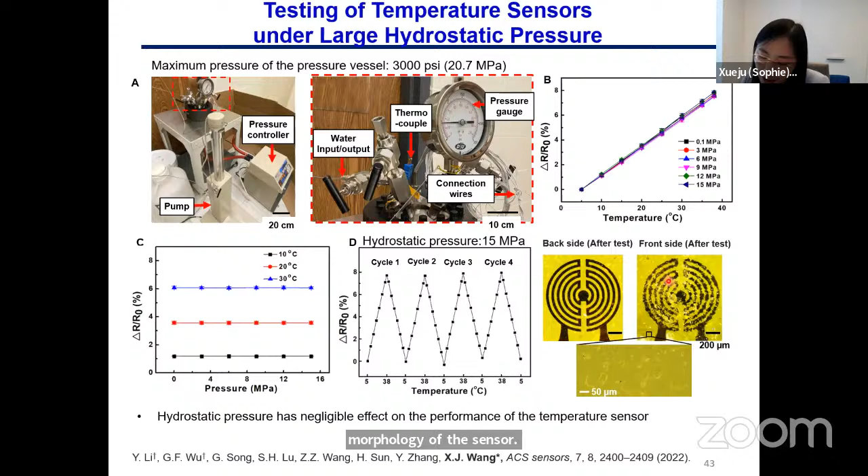In addition, the morphology of the sensor, including the backside and the front side, have negligible changes after the testing.

We further tested the encapsulation capability of the temperature sensor by putting it in a salinity environment. We can see that the sensor can survive the salinity environment for more than 7 months, which is very interesting and impressive compared to the control study using pristine PDMS, which can only survive for a few days in the salinity environment.

In addition to temperature sensors, measuring conductivity and salinity in the ocean environment is also very important. So here we developed soft salinity sensors composed of 2 gold electrodes, also based on lithography. They display very good flexibility and stretchability.

One thing I want to share with the community is that when we tested and characterized the sensor, my students and I found that the sensor would be corroded, or there would be some dissolution of the electrodes. Even when we tested using a multimeter. At the beginning, we were very confused.

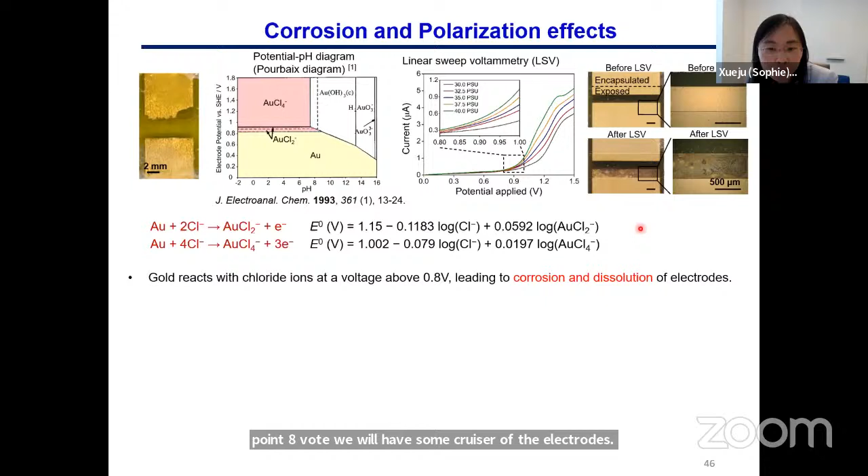This is further confirmed by using so-called LSV for scanning of the electrodes under different salinity levels. You can see that after testing above 0.8 volt, we will have some corrosion of the electrodes. So that's very important for the testing and design of the sensor, because you need to operate below 0.8.

Another issue we found is the polarization effect under DC current, DC voltage. This is because under DC voltage, there would be accumulation of ions near the electrode surfaces. That will cause a sharp decline of current, making the sensor very insensitive.

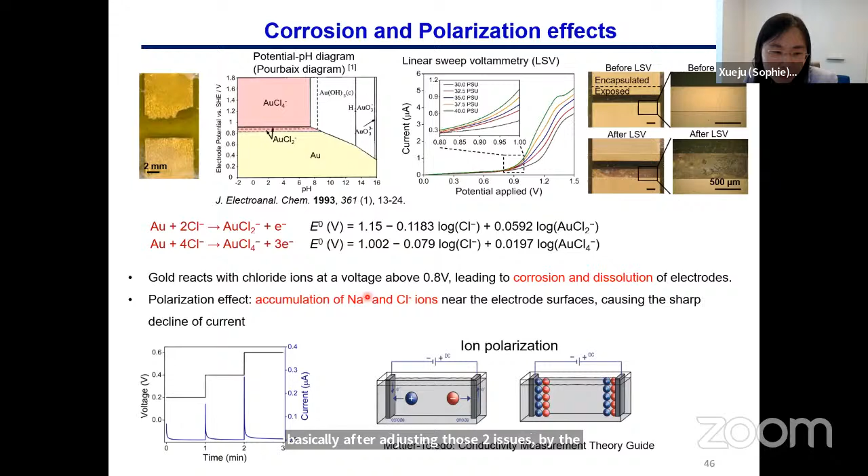So after addressing those two issues, the voltage issue and the polarization effect, we further studied the effect of frequency, magnitude of AC voltage, and sensing areas on the performance of the gold-based salinity sensors. We came up with this, although rough, hopefully useful diagram as a guideline for the use or application of gold-based sensors, especially in the chloride ion environment.

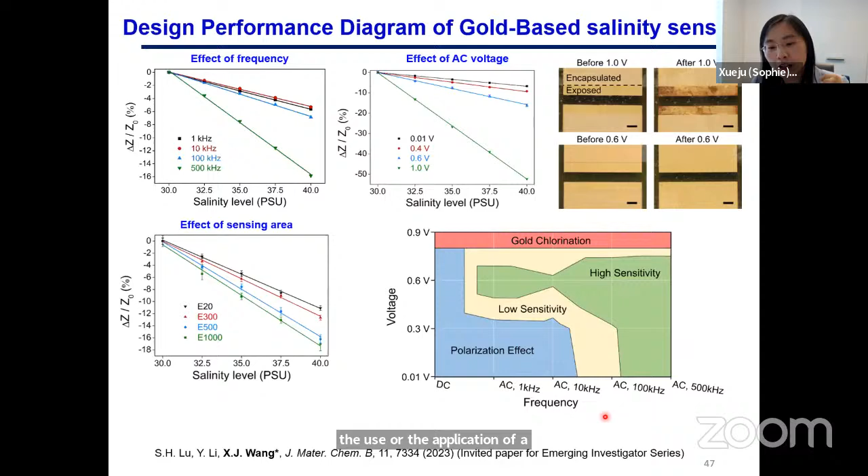Okay, so to summarize, through this talk I shared our work on morphing structures based on active materials and also based on mechanical multistability. We addressed the spatial alignment and also stiffness heterogeneity and color changing capability in liquid crystal elastomers, in hope of creating biomimetic color changing and shape morphing intelligent systems with controlled stiffness and shape morphing behaviors.

In addition, we also shared our efforts on morphing structures using mechanical multistability, which can bypass the limitation of the requirement for persistent external stimuli. I shared our experimental and theoretical approach for studying the continuous structures and also origami structures, as well as our ongoing work for fluid control. In addition, sensing in harsh environments, which is also important for mimicking intelligent systems.

I hope through my talk you can learn something about this space. I also hope that more people can join me to explore this space.